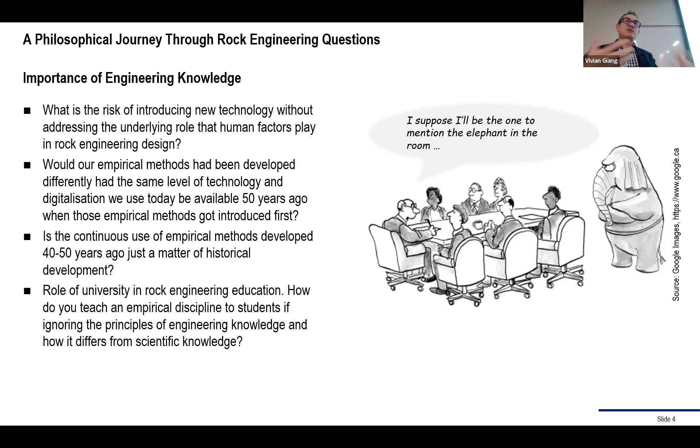And when it comes to knowledge, the first slides you're going to see don't really relate much to rock engineering. I remember presenting this at RockEng, going on stage, and I realized people were looking at me like, where is the rock? You don't have any picture whatsoever of rock. So maybe I should just put a picture of rock just for the sake of changing the scenario a bit, but we're going to focus mostly on knowledge and philosophy, and then we're going to switch to rock engineering.

And one thing I learned about knowledge is that with scientific knowledge, you would assume it works everywhere in the world. Force equals mass times acceleration; that knowledge stays the same no matter where you are in the world. Everyone's going to teach that. But when it comes to engineering knowledge, particularly empirical engineering knowledge, every person's got different ways to teach it, different opinions. Learning from someone becomes almost like oral knowledge. So everything is potentially different depending on which country you come from. Maybe they prefer one system, others prefer another system.

In Europe, you have Eurocode 7. We don't have Eurocode 7 here. If you look, for example, at books I remember from Eastern Europe, they didn't have anything about RMR and GSI, at least that I'm aware of. If you go to China, I think now they do more, but at the beginning it was not there. So everything we do is more local.

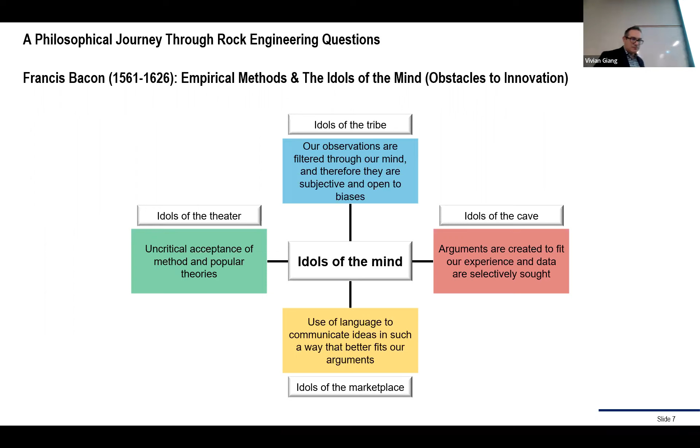So still in relation to philosophy, but now we're looking at models. Actually, one of the questions today during the defense was verification, validation, what's the difference? So here we're going to look at calibration and validation. If you do numerical analysis, everyone's going to ask you, did you calibrate your model? But then they assume that the calibration is equal to validation. And what is actually validated?

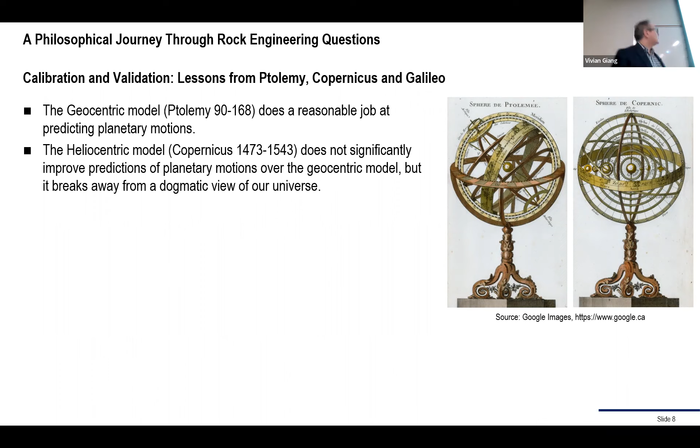Then you have the heliocentric model. We place the sun in the middle now. Everything else revolves around the sun. Still, the predictions are not really different from the model from Ptolemy, but if you look at the system, it's also not correct. Orbits are not circular. So if you really have to pick one of the two, how do you know which one to pick? Because it gives you almost the same solution at the level of our solar system. So both of them could be said to be calibrated. Technically, none of them is actually validated because the mechanism they imply is wrong.

And we go back to this kind of idols of the marketplace. When Galileo tried to say, I'm going to use the heliocentric model versus the geocentric model, the reaction that he got from the Spanish Inquisition was, no, you cannot do it. We don't really look at whether it's right or wrong. We tell you it's not right. You cannot use it. So the Spanish Inquisition didn't take it very well. It's more like a dogmatic approach to science.

So what lesson can we learn here that we can use now in rock engineering? Yes, your model can be calibrated, where it says, I put these parameters, I get this deformation, these are the deformations I get in the field. How do you know that those parameters are actually correct? How do you know you actually capture the right mechanism in the model? Think about it: if you use FLAC, 3D, any other software, try to look at the same problem with different software. You're going to see that people use different properties to come up with the same solution. So what does it tell you about the properties that we use?

And I'm starting to think that the concept of rock mass strength is not real. It's dependent on whatever system you are referred to. I think I removed it here, but there was another point directed to the DFN models. We don't really validate DFN models at all. If you look at many things in the literature, we throw fractures in a box, we put them in the geomechanical model, but then we don't validate the DFN model. And we assume because the geomechanical model gives me the correct results in terms of deformation, the DFN must be validated. But it's actually more complex than that to validate the DFN model.

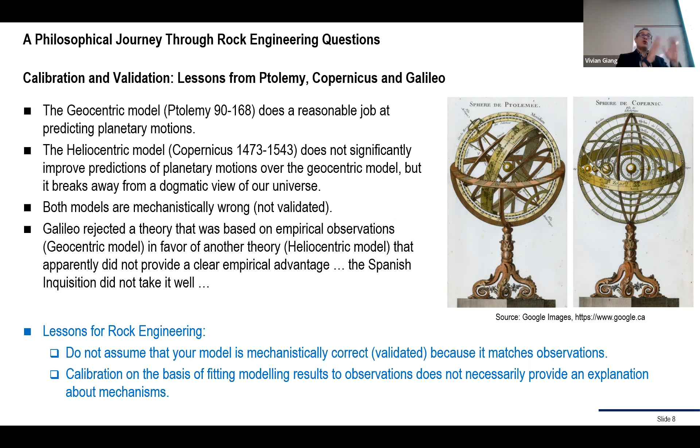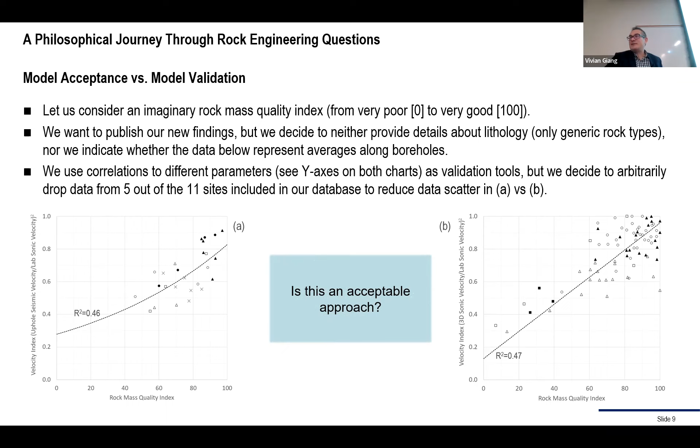So, is this acceptable? If you were a reviewer, what would you say to me? Accept, major correction, reject? Like, you think you have to do more explanation about this? So this is not made up. This is the RQD.

When they justify the 10 centimeter threshold in RQD, they use these parameters. Initially it was 15 centimeters. They said, not really good, scatter, let me get rid of some data, and 10 centimeters looks better now. These charts are hidden in a report from 1988. You literally have to dig them up almost at the end of the report, a 100-page report. How many of you actually have seen this one in university? Everyone's going to sell you the RQD with 10 centimeter threshold, but no one explains why.

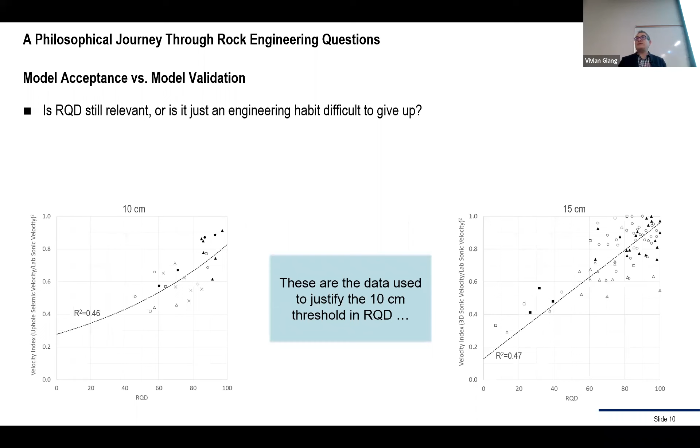And if you look carefully, it's just based on personal preference. 15, 10 centimeters, which should actually be 4 inches because everything was in inches at that time. So you can see there is no scientific validation here. But when you ask engineers, they're going to say, we use it, therefore it's correct. So we know we have many limitations and still we want to use it. We get so attached to it. That's what we call preferential attachment bias, that we don't want to give it up.

There was a paper in 2017, and the second author actually was Bieniawski, where they were questioning, should we use RQD or should we use fracture frequency? And that paper now is basically forgotten. There was a big push, I remember, from the industry saying, no, we need to keep using RQD because it ends up in RMR and ends up in Q. So that's the problem. We got attached to it, but you can't say it's validated. There's no real scientific validation for RQD.

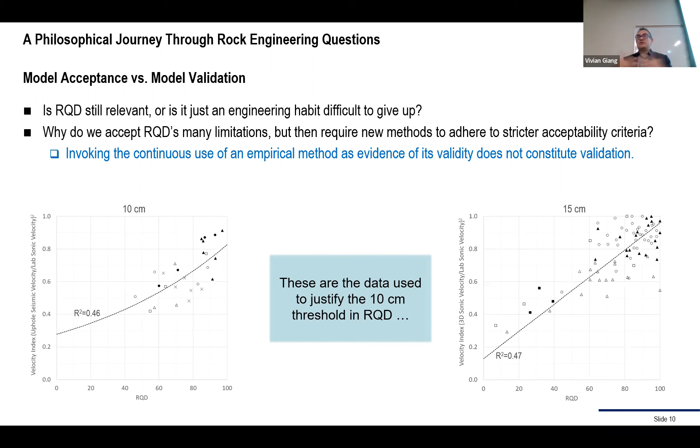In another presentation, I make kind of a joke with the Schrodinger cat: unless you find a way to really go back in time and recreate the conditions under which they developed the RQD, you can't say it's right or wrong. So we can believe it's right or believe it's wrong, and both of us will actually be correct.

Another problem that we have is actually work from Professor Harrison from U of T. I saw this table first in 2017 when he presented at a conference, and it really made me think about some of the limitations of the work I was doing. You have different scales of measurement. You have qualitative assessments, quantitative measurements. And that's okay, we can live with that.

The problem is that the statistics you can do with them are different. You cannot really do mean and standard deviation for qualitative assessments. You can do number of cases, mode, percentile, median, but you cannot really do statistics with this. So if you cannot do statistics, you cannot do design based on statistics. The problem is that RMR, Q, GSI, even RQD, all fall in this category. You have a quality, you attach a number to it. It's a classification tool, and there's no problem as long as you use them in classification. But if you use them as numbers, technically you cannot do statistical analysis.

Many books actually show that you can do statistical design with GSI, but technically you shouldn't do a standard deviation of GSI.

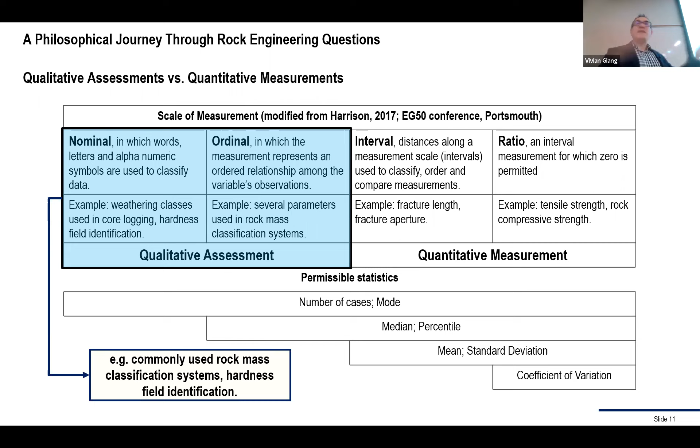And one problem that we have also is that we like correlation. Look at any kind of empirical design, people like to plot an X and Y plot, draw a line, Y is equal to f of X. These are all the correlations between Q and RMR. You can see in the literature, when you plot them on a chart, they're a little bit all over the place. And if I look at the comparison just on a qualitative basis, like what is very poor in RMR and extremely poor in Q, they're not even aligned.

And the reason why, if you actually look at the database for RMR and Q, most of the database is here. There are very few cases of very low RMR and very low Q, or very high RMR and very high Q. Most of the rock masses close to surface are jointed, so they all line up here. So that's where you probably get better correlation, but it easily falls apart there because the database does not include the data.

So be careful if you just look at correlation, and also how can you correlate something as different as RMR and Q? Because they're very different. So you can correlate the quality, like it's good and it's good. That's how you should correlate. But you don't want to have just an equation. And I think later I'm going to give another example with RMR and GSI.

Another thing I've seen, and this unfortunately comes from a real consulting project, where they had two sets of borehole data. In one set they had RMR, the other set only had RQD. They were desperate to get the RMR, so they said, let's correlate the two, and get RMR from RQD. You shouldn't really do that. Of course there's a correlation, because RMR includes RQD ratings. If your RQD is 100, your rating becomes 20 in RMR89. So of course there's a little bit of increase, but look at the scatter.

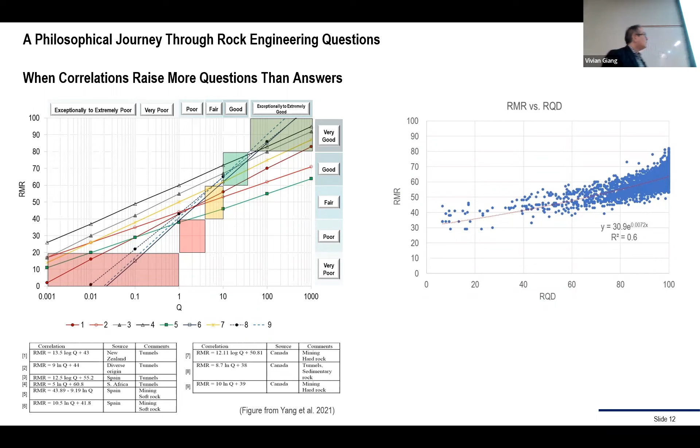Not only that, mathematically it's not correct, because RMR has RQD in it. If you write it as a mathematical expression, Y already includes X in its definition, so it cannot be another f of X later on. So that was the other problem. And this brings us to the real problem, which is the GSI.

If you really want to quantify something, it means that you measure it. A quantity is something you can measure, not something you assess in a qualitative way. So if GSI was a true quantity, then it shouldn't depend on experience. As soon as you say it depends on experience, then it's a quality, so you cannot measure it. So again, some jokes about the fact that we're using qualitative data all the time and we pretend they're quantitative data, but we don't tell the senior engineer that they're actually qualitative data.

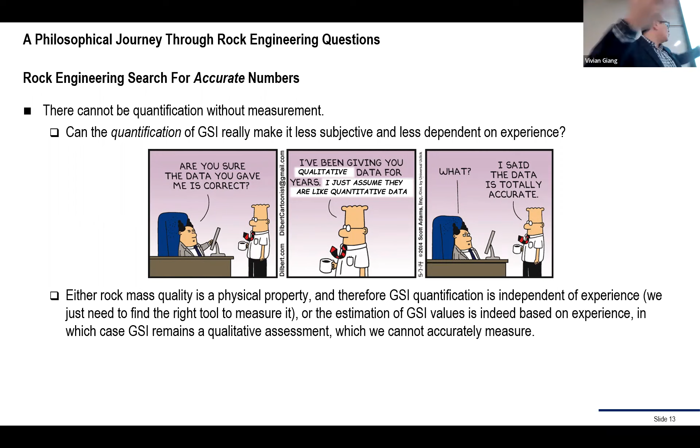So either the rock mass quality is a physical property, so you just need to measure it. That's fine, you need to find a tool to measure it. But if you say it depends on experience, it's a quality, and automatically you cannot measure it, so you cannot quantify it.

And I know it sounds like it's just semantics, just about the words, but I always kind of joke, not much of a joke, actually very seriously. What happens if there's a problem, like a rock fall or an accident in a mine, and you get involved as an expert witness? Someone maybe got killed in the accident.

You have to be very careful because lawyers look at the words and they're going to really destroy you on the words. They're going to say, did you quantify? But you cannot quantify. So that's really where the danger lies. Between ourselves, we can say it's just semantics, but there's actually a level where you have to be very careful with the words.

And that's why to me it's like, if everything's a quality, then how do you define probability of failure? Because the probability of failure is based on measurements. So how do you know something is exactly based on a factor of safety of X if everything is based on qualitative assessment?

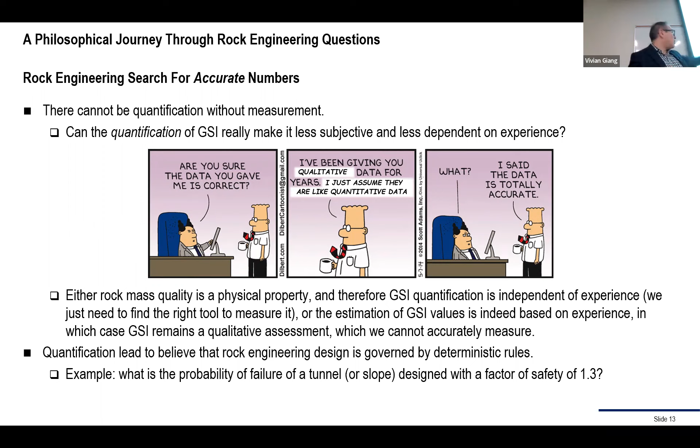So in terms of GSI, if you look at the literature, there's a list. I think we found 29 different methods to quantify GSI in the literature. It makes for interesting reading because when you try to compare the different formulas, they actually don't balance out. People then put decimal figures to GSI, which is definitely not recommended.

And what's actually interesting to see is that sometimes with these quantification methods, the tools they use to quantify are actually a quality. There's one example where they use persistence. How do you measure the persistence of a joint? If you don't have persistence, then you cannot quantify GSI. Jointing condition, it's very qualitative. So you cannot quantify something if one of the variables that you use is still a quality.

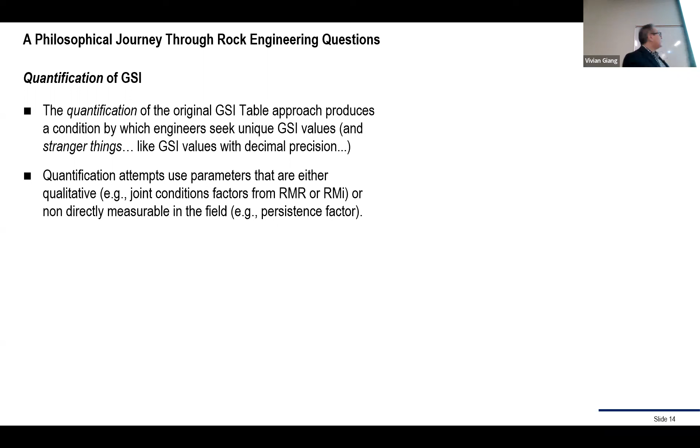And the other thing that seems actually more interesting is that when they try to justify, look, our quantitative method really agrees with the observational method where people just do it based on the standard GSI table, everything is plus or minus 10. So what's the advantage? If everything is still plus or minus 10, there's no advantage of quantifying anything because it means that just looking at the original GSI table gives you a good estimate anyway.

So it doesn't really support the idea that you need more experience to get GSI because, again, I don't really see good justification here to say the quantification, in inverted commas, method actually is better than the standard GSI table.

And actually on that one, sorry, it's not on the slides, I'm going to put it here. If you look at the original 1994 definition for GSI, it was GSI equals RMR76, so the 1976 version of RMR, or GSI equals RMR89 minus 5 for RMR greater than 23. And before, RMR76 is equal to this one. Big question mark.

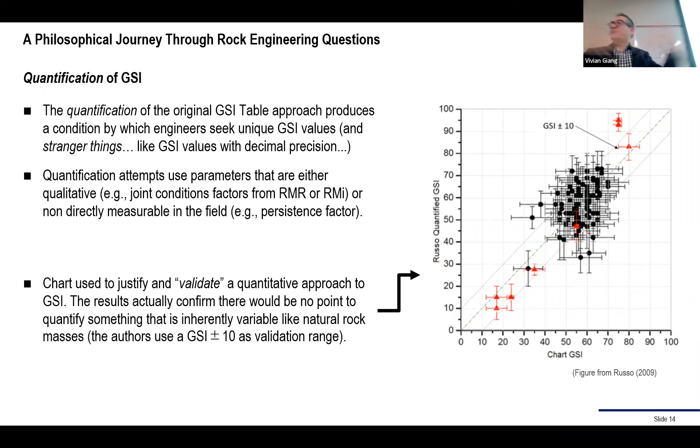And the other thing that to me was interesting, I've been using GSI for many years, and only in the last 2 years started focusing on this. When I look at the table, it now seems odd to me that you give the same quality to very different rock masses. A very massive rock mass with fair to good jointing condition, and a very blocky rock mass with good jointing condition, technically give you the same envelope.

So very different quality, very different structural characteristics, but the same envelope. That to me is not really clear, how you can actually come up with that. So how is it possible that very different conditions give you the same quality? And remember, these numbers are actually still RMR. The numbers in the GSI table are nothing but RMR values, if you look at the way it was introduced.

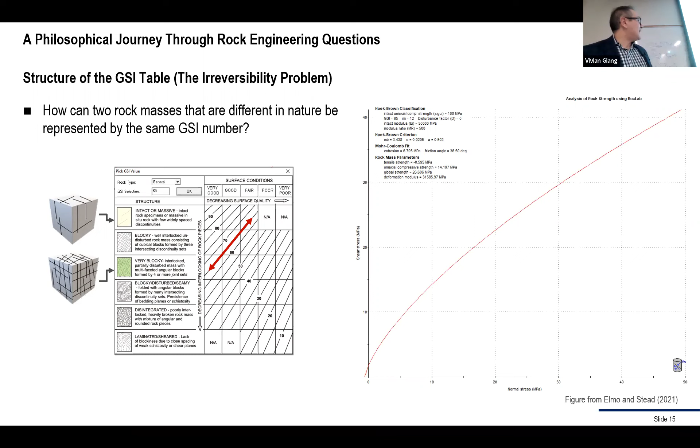And what they've done, they basically just draw these lines. So I started looking at this table, I said, how can we get the same quality for very different conditions? Because if this quality ends up in a FLAC model, then you don't know which one is which. If I tell you the GSI of a rock mass is 65 and nothing else, you cannot tell me what is the geology. You only have a number, but you don't have the geological information.

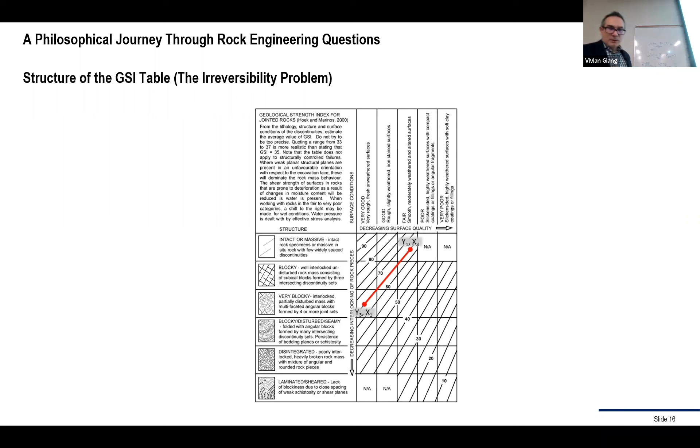So I was looking at this simple kind of analysis. I said, if I take these properties, X and Y, X1 and Y1, based on properties, and I put them in a matrix format, and I multiply the property X times Y or Y times X, doesn't matter, I get that kind of matrix. And I was saying, okay, quality 10, 9, 8, 7, 6. So these are still quality numbers.

If I multiply them, I get this kind of matrix, which is very similar to the GSI. So you can see the diagonals, basically this cell is equal to that cell, this one is equal to this one. There's some small variation, but if you look at the original GSI table, actually those small variations are there.

If instead of doing multiplication, I do Y divided by X, I get this matrix where the diagonal is always 1. And then the numbers are basically different. High and low, or if I do X divided by Y, it would be low and high. But this is very different from this one. So this is this kind of approach.

It's not this approach. But what is interesting is that recently there has been some work by Marinos and Carter and Marinos, two different papers, where they combine the geology of different sites with the GSI table, and they come up with this trend. If you look carefully, they're literally opposite to the actual lines of the GSI.

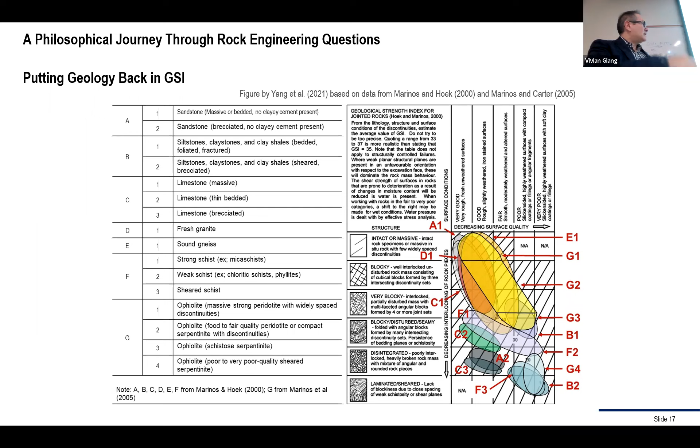So if I take now the geological trends, they don't really match the initial definition of the GSI table, but they actually resemble this one. So this kind of diagonal that splits two types of behavior, and a trend which I call going from top left to bottom right, so basically the opposite diagonal.

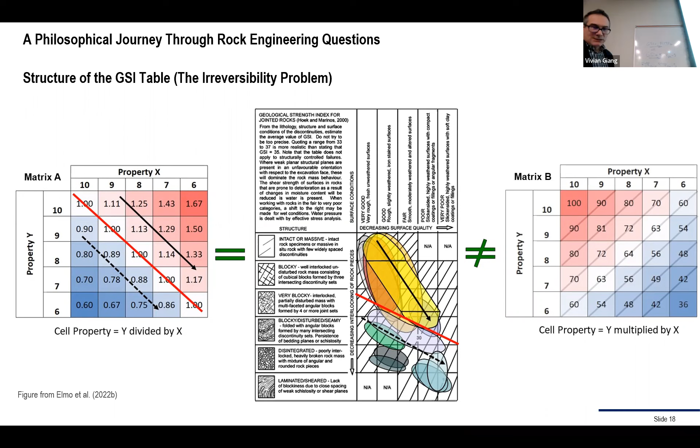So what we've done was take this one, try to get new trends, but still using the old GSI, so we didn't really change the GSI. Transform that into basically new geological trends. Clearly, these don't really exist, never been observed in the field, so we can just blank them out. We have a different kind of transition because it looks like different rock types behave differently. So the geology is back into the GSI.

And we propose this very qualitative version. We said this is 90 plus or minus 5, 80 plus or minus 5. So now this is actually different from this one, although it's still plus or minus because it's qualitative, but it's a little bit different the way we interpret it. And what was kind of interesting is that some people started questioning, well, you need to validate this table. But we didn't really change the GSI. It's just a different interpretation, not much different from the actual quantification methods.

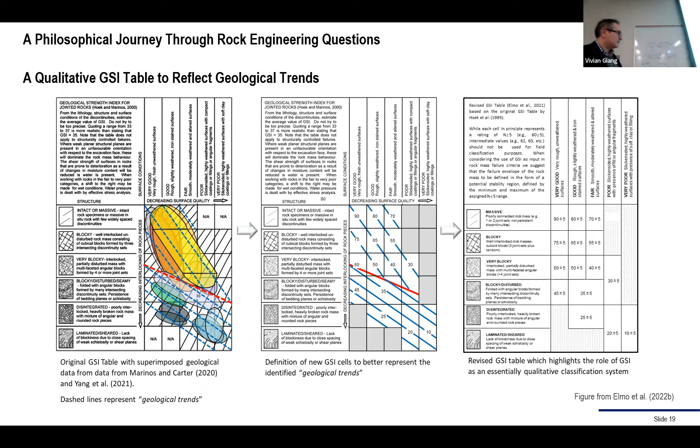So my conclusion would be, you don't really need to change even GSI. You don't even need to use this one. As long as you're careful with the geology, you can still use the original GSI table. And you're not going to need more precision or accuracy than that. Actually, you can have a precise GSI, because many people get something similar, but you cannot have an accurate GSI because we don't know what the real GSI of a rock mass is anyway.

So in conclusion, I think we need to recognize that everything we do is subjective, is based on quality. So you're always going to have human factors at play. They will not disappear, even if you use machine learning. We need to recognize that our education, our approach to design, influence the way we actually even teach rock engineering. And engineering methods are not universal. So there's really no universal method in rock engineering.

When it comes specifically to GSI, to me, it's like, why can't we live with the original GSI table? Why do we always have to find something else to quantify something that cannot really be quantified? So why don't we like variability? I mean, why can't we say GSI equals 60 plus or minus 5 and take variability into your design?

Because there's always variability. If you do DFN models, you know that every time you click run, you get a different realization that looks different, but with the same statistics. But they can actually behave very differently if you put them in a geomechanical model. And the way I summarize things is this one.

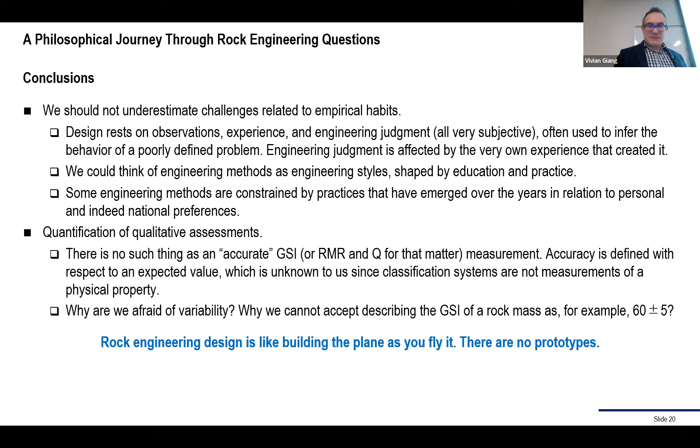And that's really what is limiting, but at the same time makes our field more challenging, and challenging is more interesting. So these are references that I used to build the presentation, although they were maybe not specifically listed in the presentation.

So if we go with a quantitative model, how do you verify this? That's another problem, because think about it, if you build a slope, you start excavating the slope, validation means that it's based on future data. You can do a back analysis if you have something that failed, or you can say, I'm collecting monitoring data, so I can see today my model is being updated, it matches.

But how do you do long-term prediction? To do long-term prediction validation, you need future data that we don't have. And I think that it's not limited to rock engineering. With any model, you cannot really make long-term forecasts, because eventually things may change. Even with weather forecasts, they keep updating the model. They say 14 days, then they feed in data, and it gets better and better. And they have an advantage: it's based on real measurements, not like us, which is based on quality.